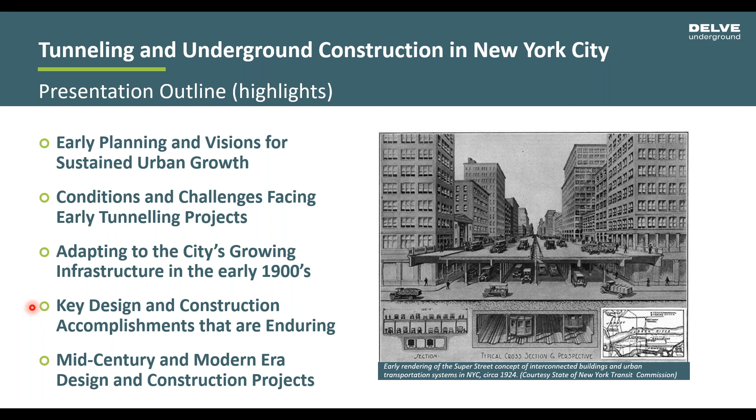Probably the operative word here is enduring, because a lot of things we use today in the city were built 100 years ago. You probably came to work through some facility that's not less than 60 years old. And then some mid-century and modern design and construction projects. I'm just going to touch on them, but it's a broad subject, so I can't cover everything in great detail. Most of our meetings and presentations always start off with a safety moment.

When I found these pictures, I didn't really have a technical use for them. I had a better use for them, and that's the safety moment for this presentation. The one on the right is one of my favorites. It's like everybody's going in the tunnel for an inspection. They're not dressed for work. They're in an open bucket of some description. It's about as haywire as it could be. We don't do this anymore.

The one on the left side is just as bad for different reasons. It's an open, non-decked area in a public environment. I don't know what that fellow's doing walking on the beam, but he's not doing it right. But anyway, all of our meetings, all of our engagements start with a safety moment. This should be no different.

I'd like to give credit to several people right off the bat. Ian Chaney, thank you for the invitation a little while ago. And David and William, I look forward to presenting with you. Anthony Del Vescovo is one of my colleagues from working on the 2nd Avenue.

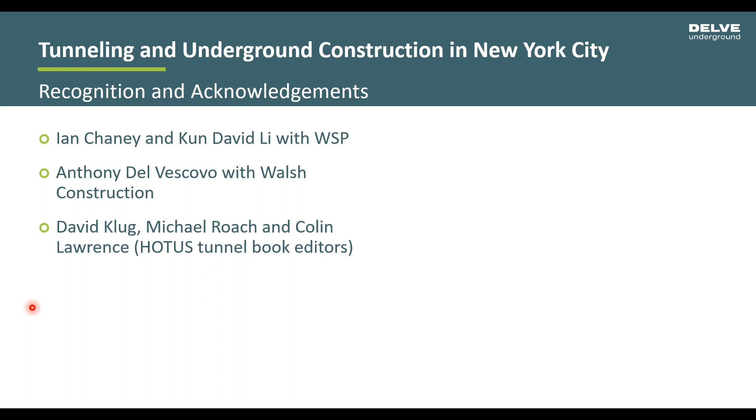He contributed to this, and so did David Klug, Michael Roach, and Colin Lawrence, who are also co-authors and editors of this book, which is a 3.5 year volunteer effort. Some other organizations contributed one way or another to this presentation and need to be acknowledged. See them on the screen.

But there's some others that get no attention whatsoever unless you're really digging. And that's the visionaries. The visionaries in the city years ago, actually decades and centuries ago, that had the idea of what they really wanted to see in this place. And you'll see various slides and various imagery that attest their capability and how they saw this city.

Excuse me, I'm losing my voice.

Okay, other people that need to be acknowledged are people that actually build things. The Sandhogs, the operating engineers, and so on. And finally, even though this is a large city that's, let's say, arguably office and residential, there's an enormous infrastructure here that is linked and that is contributory to actually building work, which is a little bit unusual.

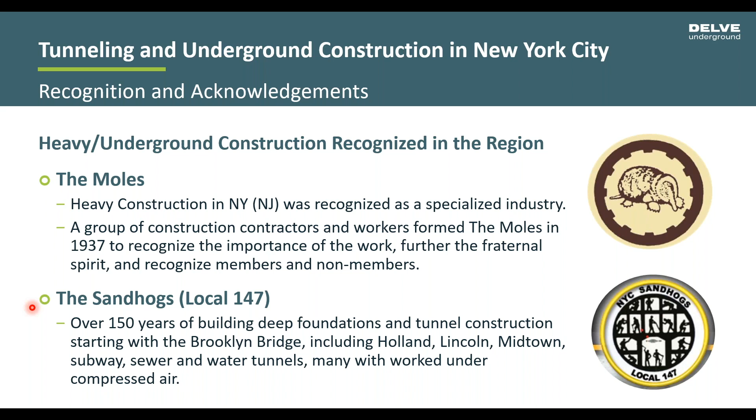So going on to the early planning, the city had a vision of what it wanted to be. Mobility was a big deal, and you'll see some images here of how congested the Lower East Side and Lower Manhattan really was. Sanitation was challenged for sure. Growth and prosperity, this was going to be the center of the universe. And many people who live in New York know it is, even now. So quality of life was always a question.

People lived downtown, they worked downtown, they lived in Harlem, lived in other parts of the boroughs, but they wanted to integrate city planning and transportation seamlessly. So there's a lot of joint use developments that came about.

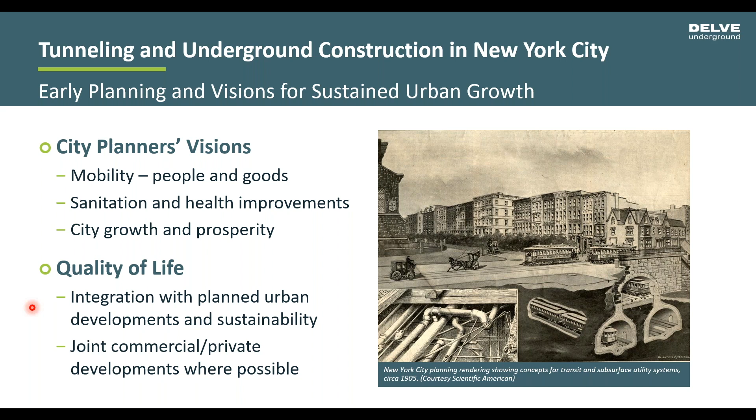This image on the screen is actually very popular to me. It's Scientific American, roughly 1905. That looks like an SEM tunnel or TBM maybe, but long before any of these were invented or conceived, they had a vision of what they really wanted to have.

Furthermore, that image there is Second Avenue in 1924-ish. What's going on there, among many other things, oops, this thing backed up on me, is integrated systems of transportation, multiple levels, multiple modes, along with buildings and other commercial activities. But this is all part of the city planning. You see in the upper bullets there.

And then sustaining. This city did not do something temporarily or with a short life cycle. As I said, many of the facilities we use today, getting to work, going home, or in our daily life here, are decades old, and they will continue. They become older, but they're no less useful if maintained.

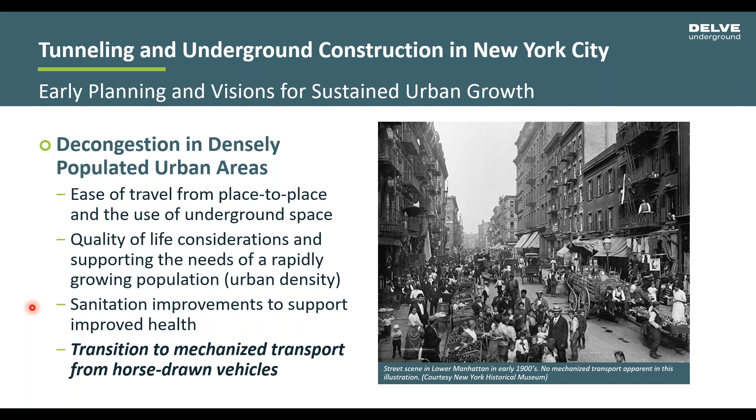Well, the city was finding itself almost not imploding, but basically over-congesting to the point it couldn't expand and it couldn't function. Then the transition to mechanized transport. This is a pre-car image.

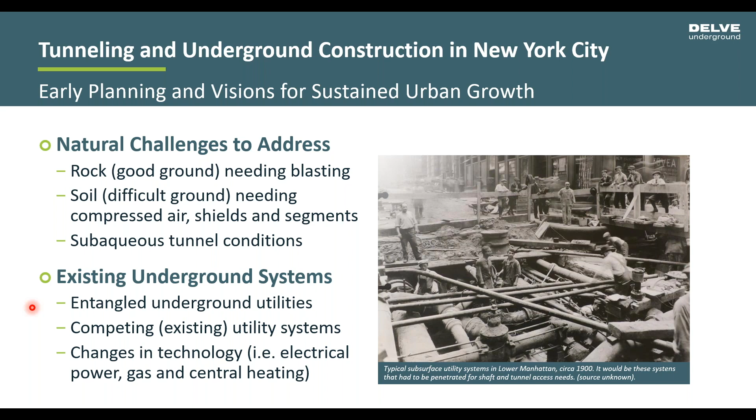The other problem with utilities, I'm just going to say briefly, it does have something to do with tunnels. It has everything to do with tunnels. They're very difficult to manage. If you've been involved with planning major infrastructure projects, the utility relocation work in advance of underground work is horrendous, long, difficult, uncertain, and costly.

Now there's another piece of Grand Central that's not on here, and that's some of the utility rooms that are, to engineers, pretty captivating because they're very deep.

Okay. So again, more joint use of space, commercial and personal and private development. Some of the conditions and challenges facing early tunneling projects. Oh, there's a screen here. I have to show the Viele map.

Does everybody know what the Viele map is? Yep. Everybody put their hand up. Thank you. Like this. The Viele map, first of all, it's a nice piece of artwork. It hangs in our home, at least a copy of it. We went to the map room at the public library, my daughter and myself, and they brought out the original, 4 pieces. Of course, we took it out of the plastic sheets and got our fingers all over it, but they're quite big, but it's there.

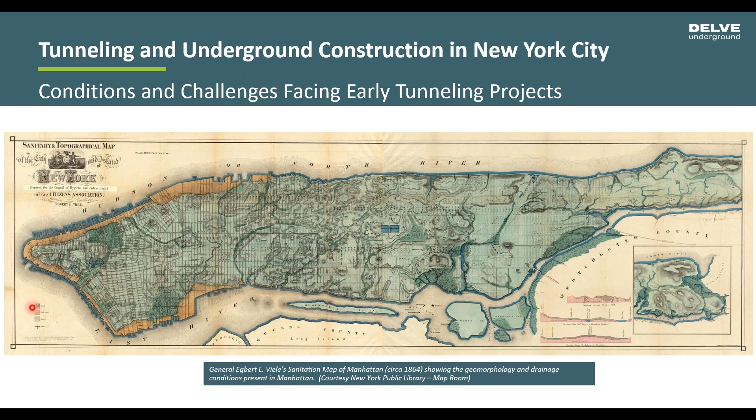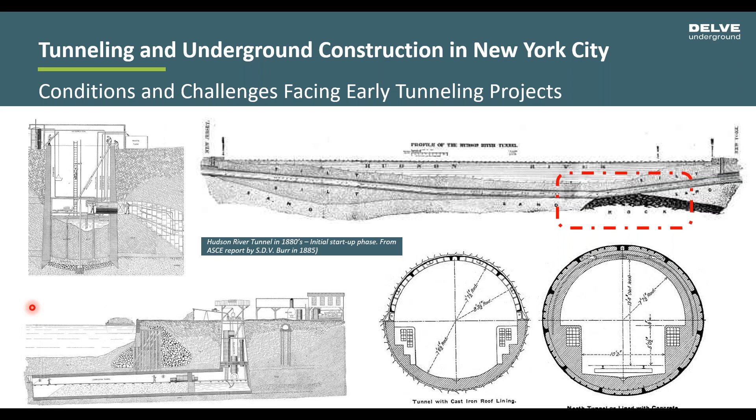So in these 2 images, you see the shafts on the east and west side of the river, and then the cast iron initial liner and the final concrete liner for the rail tunnels. And these are relatively small. These took something like 25 years to build from beginning to end. Okay. Then we get into a rather significant job. I'm just going to touch on this. This in its own right is its own presentation.

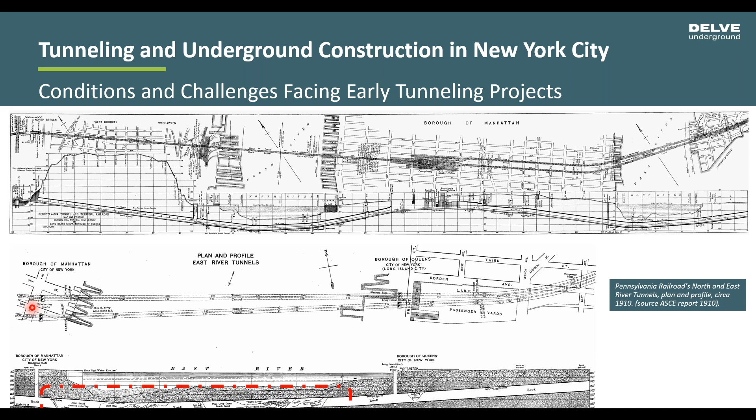These are the Pennsy tunnels, the tunnels across Manhattan from New Jersey across the Hudson. And this was a very major undertaking around the 1910, 1915 era. Again, extremely well chronicled, illustrated in ASCE publications. This is just a piece of one side of it, and the reason I flagged the portion of the image on the bottom is because that's face mapping. That's the early stage of somebody actually looking at the geological conditions in the tunnel as it's being mined and lined. In that particular section, it would have been rock tunnel, so they could actually see the rock.

And the methods of construction included top heading and bench. These are very primitive drills and methods of ground support by our standards today, but in small mining operations, unlike tunneling, they're actually still used. There's some other things that are not used, but nonetheless, some of this is still being used. Soft ground tunnel shields. Remember, soft ground tunnels and shields are really an embedded element of construction of tunnels in New York City. TBMs, I will touch on this later, did not come into the city till the last few decades.

Again, one of the more notable tunnels, this is the first subaqueous tunnel in North America. Goes from, let's say, the Upper East Side to Long Island City. It is a gas tunnel. It was a privately financed job. It was mixed face, rock tunnel, and soft ground. And then the cast iron liners are shown here.

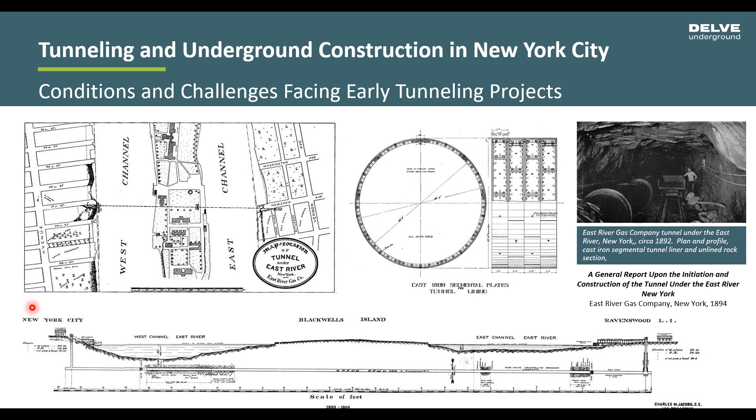And these images actually come from about a 40-page report written by a guy who was in charge of the Hudson River tunnels, went over to the east side and did work on those tunnels for a few years. This tunnel, as long as it is, was built in about 2 years. And as far as I'm aware, it's still in service today. Okay, that's 1892.

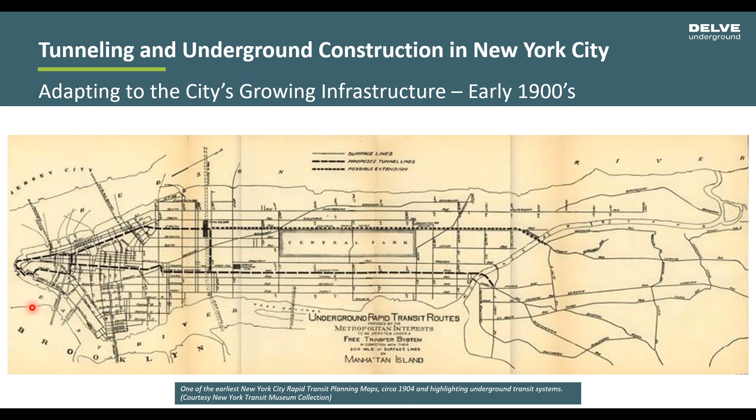I won't go into detail, but let's say 2nd Avenue, which we know has a subway, it used to be an elevated. 3rd Avenue used to be an elevated. Okay, so things are not always that easy. There's a pretty good image if you look at it in various pieces where it was like, we're going to build a subway. It's 1905. We don't have environmental controls. We don't really pay too much attention to settlement, building deformations or anything.

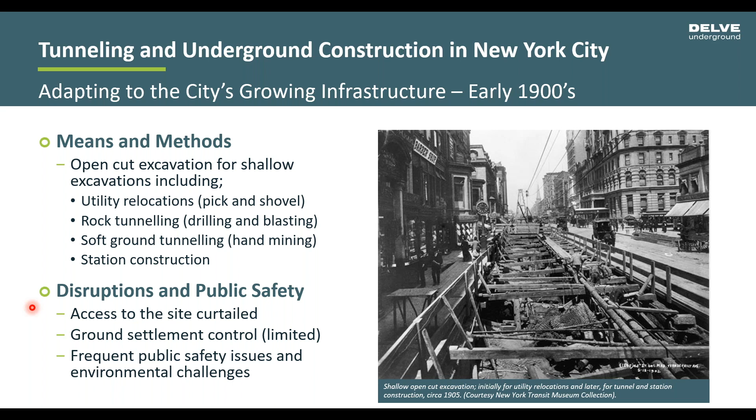Okay, disruptions to public. I keep coming back to public safety, disruptions, quality of life, and that type of thing. This is a theme that is with us now. It's much less than it was decades ago, but at least in this picture, they've got some handrails and a few other things that attend to public safety. If I have time, I'll tell you a little bit about some environmental controls in 1912 that affected Second Avenue subway. I don't know if time will work yet.

Okay, moving on. We've got other subways being planned. They're in competition. We've got, I never get this right, IRT and the BMT competing with each other. Both have major underground operations, be it stations, tunnels. They take up a lot of real estate. They have power plants, cable tunnels, a lot of facilities that run these operations. Eventually they are merged.

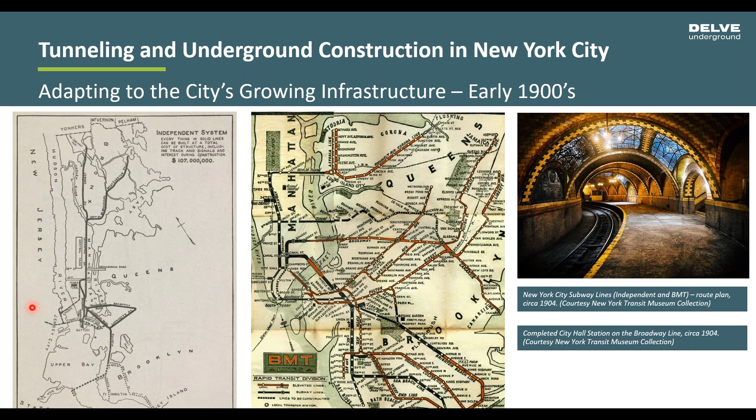But I always like to give a picture of what can be done. And if you look at this one, this is City Hall Station. I personally have not been to this one. Has anybody here had the tour? Is it as grand as what it looks like here, or better? No? Subway conductor. I've been there several times. But it looks wonderful, and it is what it is. It's decommissioned, but this is why when we talk to the public, we can build these things. We can design, build, maintain.

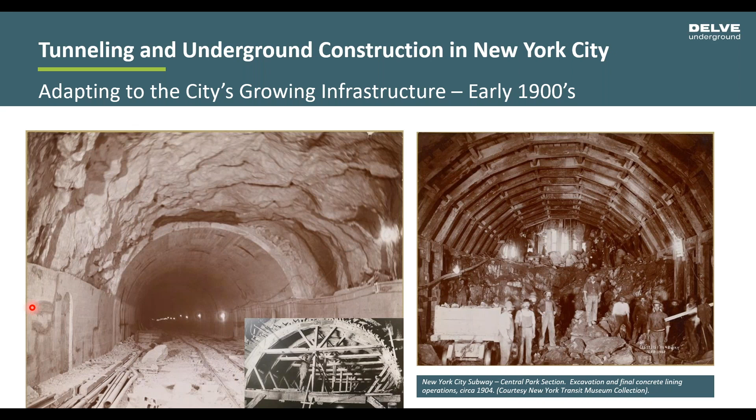Tunnels under Central Park. What's interesting about these images, it really should perhaps talk about the right-hand side. That's ground support as much as it is at the time. But then you look at the left side, the rock portion. It's not a single rock bolt, no shotcrete, no ribs, nothing. And there's a ton of overbreak. That was a bad word at Second Avenue. We had a lot of it. But here you can see the liner, you can see the overbreak volumes outside the liner. But this is work in progress, and we're still doing the same thing with the same forms today. At least they haven't changed too much.

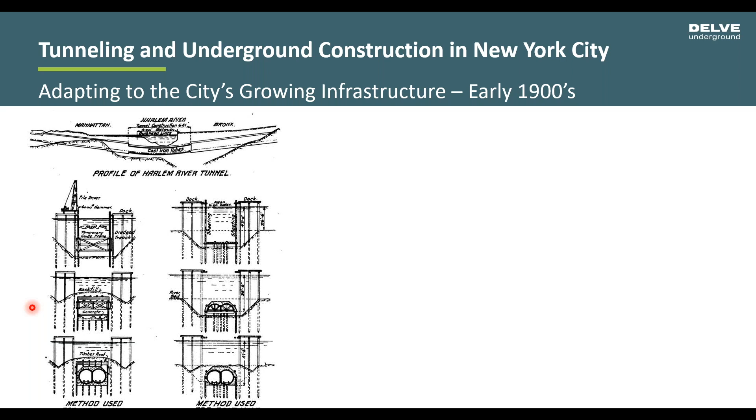This is Harlem River Tunnel. I think it's line 2. Here's lines 4, 5 and 6 with an image of a quad tunnel.

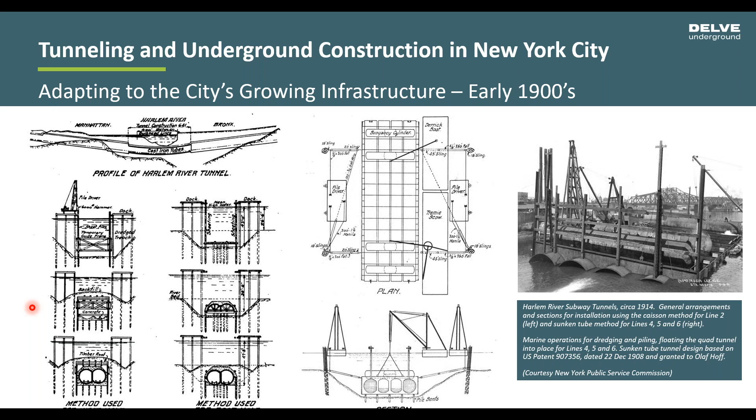And rarely do you see that even today, a quad tunnel. Now, maybe precast concrete, something of that nature in Europe or South America, but we don't see that very often today. Remember, this is in the day of pre-diesel engine, pre-big crane, pre-pontoon floats, and they're doing this around 1915. More of the same.

Here's the drawing from one of the historical researches I did, some of the dredges that were used. And again, this is back in the day when a lot of things we think almost nothing of for marine work and construction work, that's what they did. And this crossing was only like 600 feet. It wasn't particularly long because they had approaches in a water environment. And again, much the same.

We're trying to sink a four barrel sunken tube. I call it sunken tube. Other people call it immersed tube. They're the same. And before I leave that, I really want to say that the patent for this and the original tunnels on this are American. First sunken tube in the world is Detroit. This one I just showed you a second.

Okay, so if I get a drink here, we'll go on to means and methods. I'm just going to touch on this. I know this is a geotechnical crowd or structural crowd. Talking a little bit about means and methods is probably healthy, because I'm not sure who's ahead. That is, the mechanics ahead of the dirt and rock, or is the rock just getting used to it, you know? So this is a typical tunnel shield.

This is something that Alfred Ely Beach would have designed, or his counterparts previously, Barlow from England, Greathead from England. They're all very, very similar, and they're just a shield. They don't have grouting, they don't have drills, they don't have a cutter head, they don't have much power. The survey systems in here are candles and mirrors. I can't begin to explain to this audience how they work, but let's just say it's a set of mirrors, and there is another historical image that has the grid, how it worked, and it's also the same image that shows donkeys in the tunnel hauling the muck out.

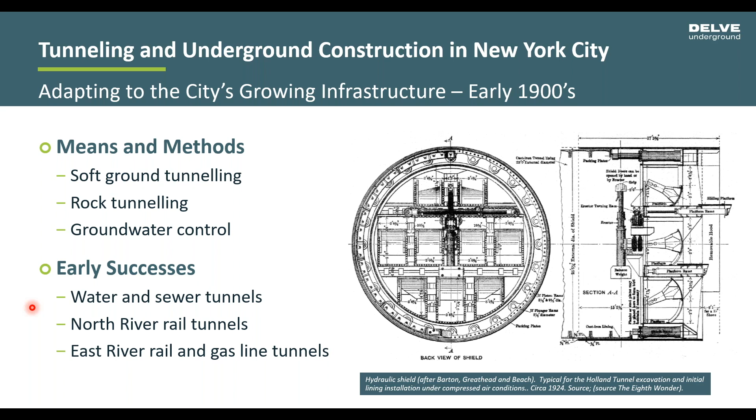But the early tunnels, North River, which is Hudson, East River gas line and other tunnels, this is the type of equipment they would have used. So breasting, you can see the gates on the far right side, but everything is pick and shovel after that. Okay.

This particular, I'm tempted to pass this around, I probably won't get it back. This is a 1925 tray. That image is here. I'll just read it. Hudson River Vehicle Tunnel commemorative tray on the occasion of the North Shields coming together. So that's what it looks like, there you have it. This tunnel went in service in 1927, it's still in use today.

Okay, so what we got now? Now we move on to other tunnels, similar configuration. About 10 years later, this equipment was used for the Lincoln Tunnel first tube. And it didn't really change between the first, second, and third tube, because they're similar ground, similar machines, but pre-TBM. TBM as we know it, as the mobile rotating cutter head. So you got the Holland Tunnel, Lincoln Tunnel, and eventually you're going to see the Queens Midtown Tunnel.

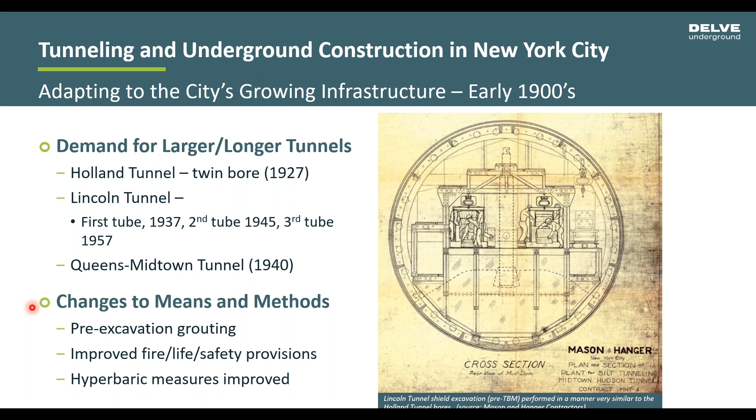But they still didn't have things that were perfected, like pre-excavation grout, which we love today because it changes the ground characteristics, so our mechanical excavating devices and other facilities work better. They didn't pay much attention to fire life safety systems because there's lots of people running around those tunnels that don't look like they belong there. And hyperbaric pressures, a lot of this stuff wasn't really well understood back in the day. Today, with more science, it is far improved.

Okay, environmental, I need to touch on this briefly. Some time ago, a bunch of us put together a very large paper on tunnel muck haul, treatment, spoil. I was just about blown away when I realized through some research that Governor's Island is really the muck that came from the Lexington Avenue subway in 1915. Which sort of explains why it doesn't have trees to some extent, but apparently somehow the muck made it from Lexington Avenue across the water on a barge and landed on the island. So here we have it. What they did about water control, water discharge treatment, don't know.

I know what we do today, and it's a big part of the expense and science that goes into these jobs. Another thing, I mentioned hyperbaric a minute ago. Back in the day, almost every soft ground tunnel in the city was approached as a compressed air tunnel. Well, at least up to a couple decades ago, that was the norm. Now today we have earth pressure balance, but we still use compressed air in airlocks to do servicing of earth pressure balance equipment.

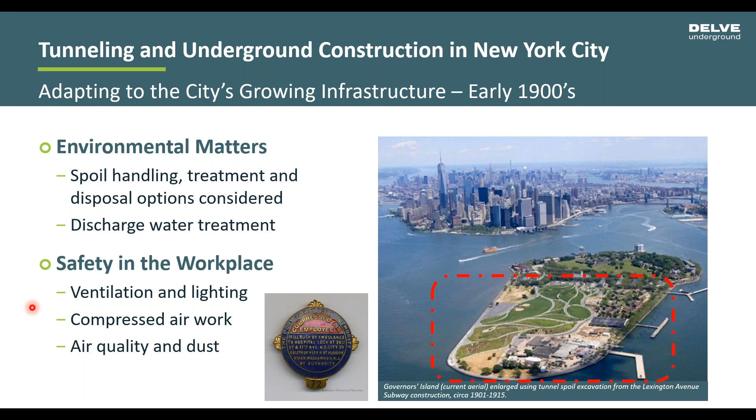That's the badge that people wore if they looked like they were in tough shape, they had the bends or whatever, and they were away from the tunnel. It's like a medical alert badge, okay? But we have far better controls on airlocks, medical locks, people training than was present decades ago. It's commonplace now, but we do not normally use compressed air tunneling. We use compressed air airlocks to get ahead of the cutter head for maintenance and so on.

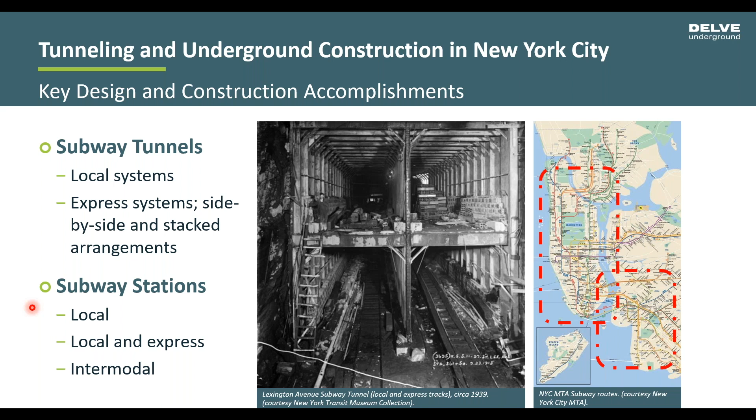More tunnels. Again, the subway tunnels are a big part of the early part of the 1900s. Almost nothing in the middle part except in the 1940s, tunnels under 6th Avenue, but they're all cast iron. There's no fabricated steel for linings. There's no precast concrete. And there's reasons why materials were chosen, largely to do with economics, but also structural, or the infrastructure in the area would not support, say, fabricated steel, whereas in the case of BART, San Francisco, Kaiser, fabricated steel was the answer. Here, in this environment, all roads seem to point to cast iron. So nothing really changed for literally decades.

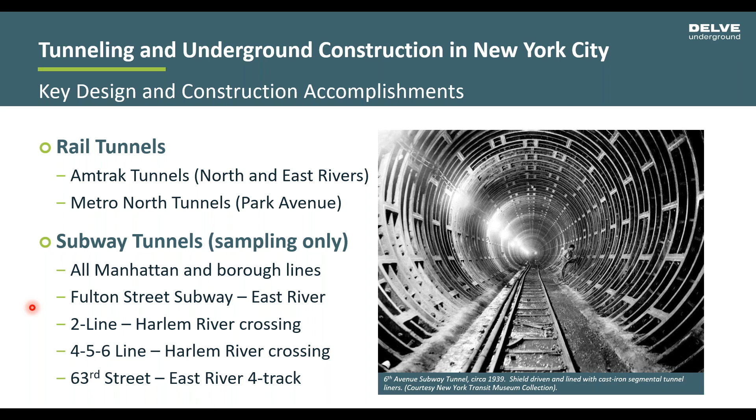Okay? Then I'm just going to touch very briefly on some road tunnels. I've talked a little bit about these, but a few more slides that are important. Holland Tunnel, first vehicle tunnel under the Hudson. I'm sure you all know about it, drive through it, stay away from it from time to time because of the traffic. Very notable from a geotechnical perspective, ran into rock, had to do some blasting in front of the soft ground shields. Very notable from a ventilation and gas extraction point of view. Some of the people involved came from other tunnels. Ole Singstad went on to other tunnels, became very well known in the tunnel industry in North America, largely because of what they learned and achieved here.

That was one of the original concept drawings. Again, I like these things because this is the original thought process of ventilation. They're hauling coal, little cars and trucks. It gives you a sense of scale. If you did that today, it's probably a little short of a shoulder or a pedestrian walkway or fire life safety systems, because they would have been larger tunnels to make them all fit.

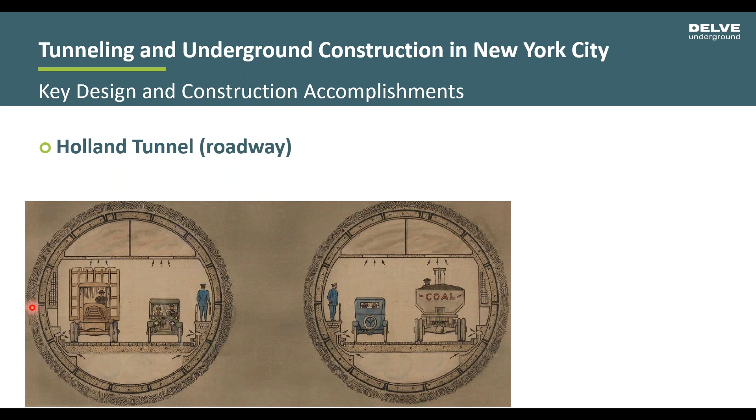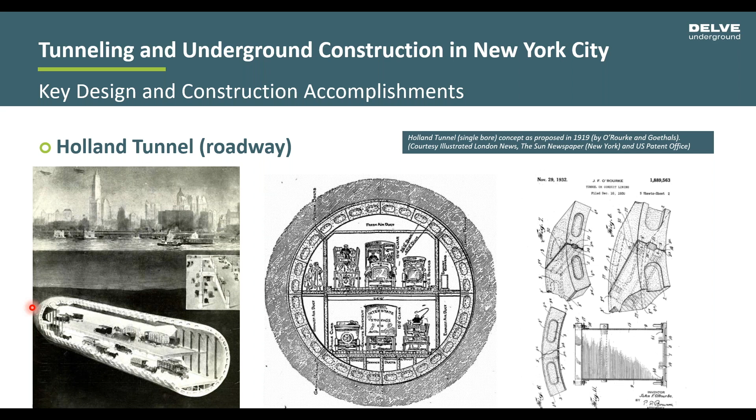It didn't get built. This proposal was made by O'Rourke and Goethals. Goethals is Goethals Bridge, Panama Canal, same guy. It didn't get built. It got built in favor of a twin tube. Same era, 10 years later, almost the same scheme as Lincoln Tunnel first tube.

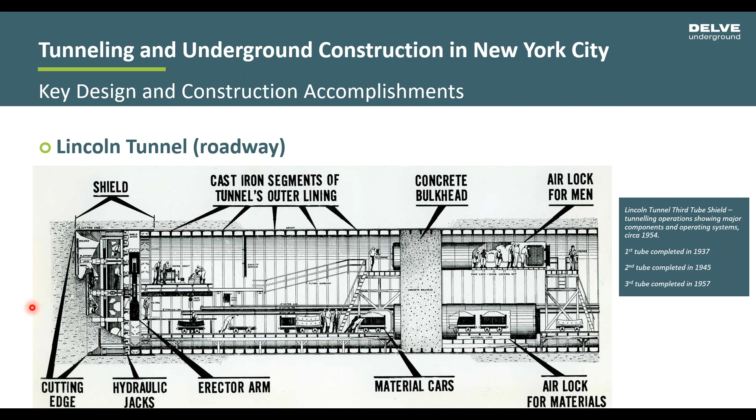Again, this is interesting because it's getting more and more mechanized. We're using cast iron segments. We've got a more elaborate airlock. We've got a lot more goings on inside these tunnels. We've gotten rid of the horses to draw the muck train out and so on. It's virtually the same view with more cross sections. So you can see the enormity of the weldment. And this was prefabricated, lowered in place, and off it went. There would be two of them for each tube.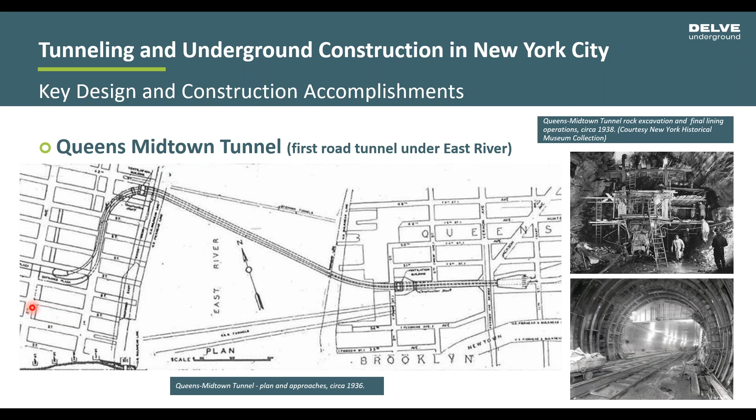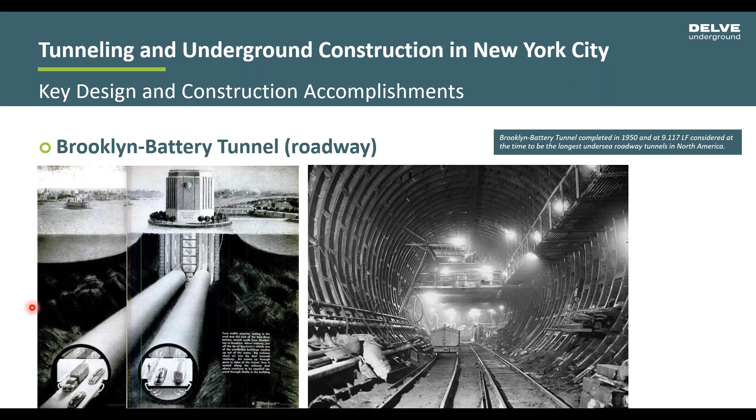This is an interesting tunnel by itself because there's very little chronicled in the technical press or ASCE or any of the societies. This is the Brooklyn Battery Tunnel. It's very significant because it's the longest underwater tunnel at the time. But because it was built post-war, I suspect there was a little bit of secrecy. There's more written about this tunnel in Popular Science and Popular Mechanics than anywhere else, or Look magazine. But again, still in use today. I think it was commissioned around 1950.

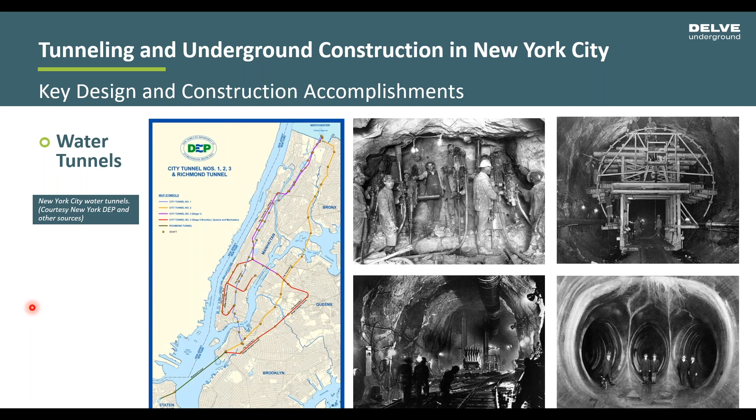Now, I'm not going to say much about water tunnels. I'm sure everybody knows a lot about water tunnels. It deserves its own lecture because they are very significant. This is just a map of, for instance, the local tunnels around Manhattan, some of the vintage drawings or photographs, but that's what we used to do, unmechanized. So it was mechanized from the point of view of having an air drill, but it was not mechanized from the point of view of hydraulics and other equipment that we know today. We wouldn't normally do that type of tunnel today without major TBMs.

And it was eventually built in the late 60s and early 70s, but it was like the tunnel to nowhere. At least the top, I'll never get this right. The top two tunnel carriageways were used, the lower ones were not, for the longest time until Second Avenue Subway was commissioned. Okay? And that was in 2017.

So now we're going to talk briefly about Second Avenue Subway, which is one of my pride and joys. I worked for the contractor. We built 72nd Street Station and tunnels. Initial planning in 1929, but the documents go back to 1922. So 100 years ago, people were thinking about putting an underground subway up Second Avenue and getting rid of the El. Okay, they had a vision. And part of this is mobility, as I keep saying, part of it is just growth, commercial development, and so on. But about 2 months later, the Great Depression kicked in. Okay, so we restart in the 1940s and 50s.

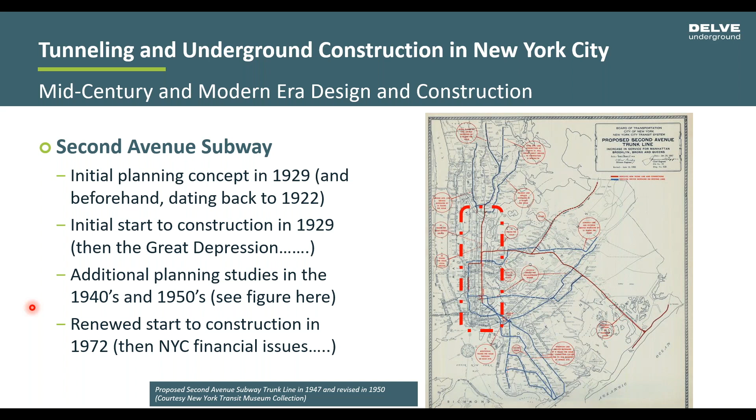There's, get my image right. This document, this drawing is edited in 1950. There's a very important connection of Second Avenue Subway with 63rd Street Tunnel, which is probably a dream at the time in around 1950. But then in 1972, it sort of got a restart.

Here are the people on the ceremonial pick and shovel, picture taking opportunity. Anybody recognize people in the picture? Sure. Who? I think that's Mayor Lindsay. Who? Mayor Lindsay. Who's the guy in the middle? Rockefeller, yeah. Well, that's the one I recognize, but okay. And then actually, some of the work got built in the high 90s. Yeah, that was Mayor Lindsay, yeah.

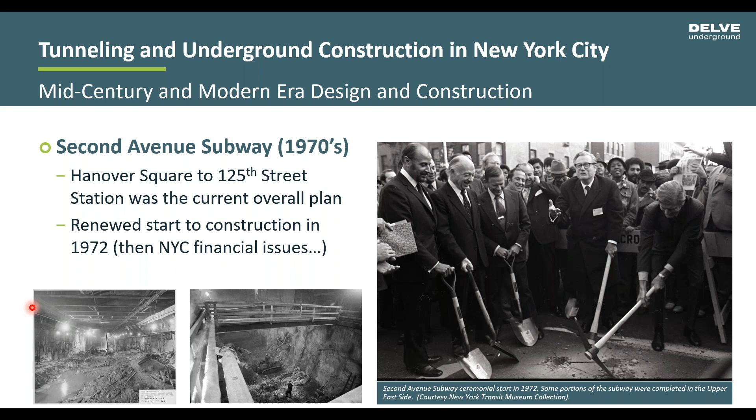Okay, and some of the work got built in the high 90s and got, I'd call it, mothballed or abandoned. Later, it got restarted in around 2007. This is the hoopla to say, oh yeah, we're on it again. These gentlemen seem to be pretty happy about it. And then the concept was different.

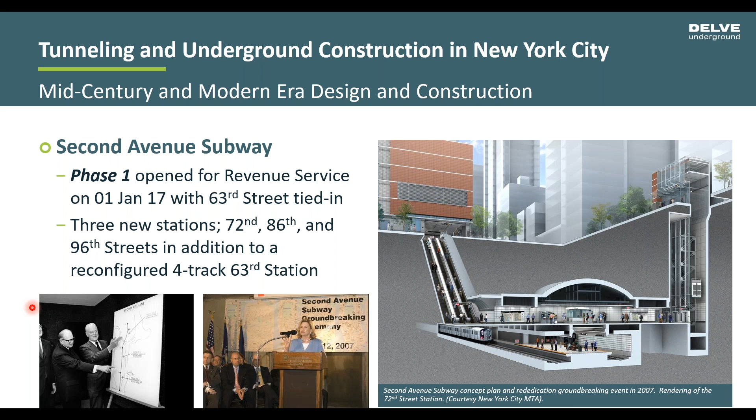It was different because it would have high arch, a lot of voluminous excavation, stations that you had lots of artwork, which I'm not showing pictures of. It's a geotechnical conference, but the artwork in these stations is fantastic. And it makes you feel like you want to ride the train. So that's 72nd Street. There's many other images much like that for 86th Street and 96th Street.

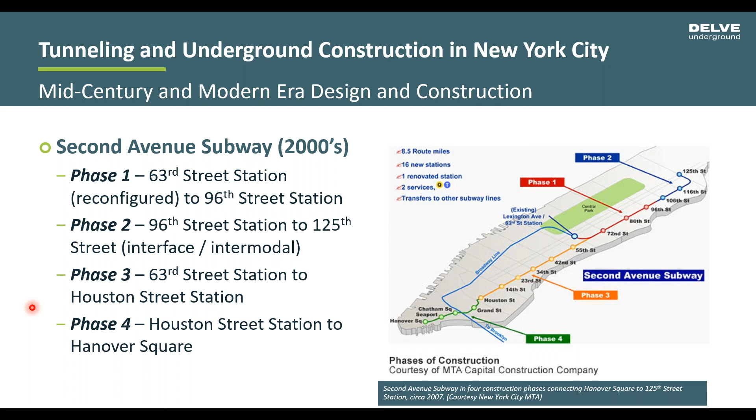So as you probably know, there's several phases. We finished phase 1; phases 2, 3, 4 are in the future. Remember, the concept started in 1929, so the future is quite long. And then say one more thing.

This is our job. And people in this neighborhood were, I would say, not anti, but not in favor of; not in my backyard issues would creep in, disruptions to their lifestyle. They didn't like blasting. The windows would shake. It was kind of annoying. And then you go to community meetings and people stand up, pound the table and say, when will it be done? I want my grandkids to ride the subway. Come on, move it, let's go.

But there was also a bit of a revolt over dust. And I bring this up because this was current. This is something we had to deal with. And then years passed, decades passed, it didn't come up. Same with blast vibrations and so on. So

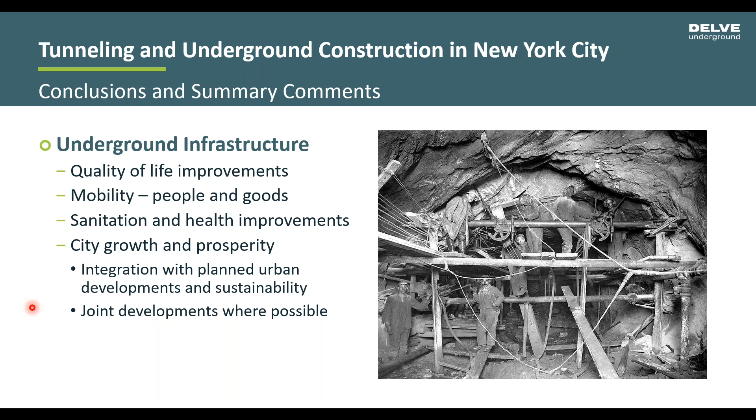Conclusions and a little bit of a summary. This is much like I started. Why do we have all this? It's enduring infrastructure, quality of life, mobility, commerce, growth, prosperity, and integration. So we don't have to spend a lot of time wandering around on transportation systems, other systems, utility systems that work some of the time, but it's all part of better use of underground space. And then use of technologies.

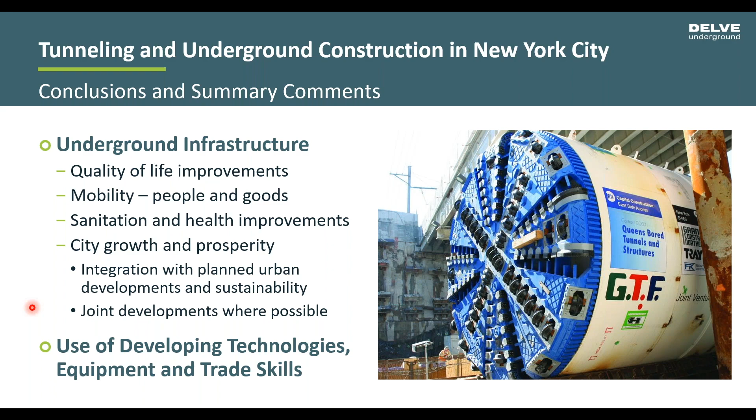This is the Queens Bored, we call it Queens Bored Tunnel. There's 2 TBMs in the Sunnyside Yard area. And since then, there's been TBMs on 2nd Avenue and the Water Tunnel. But it's been a long, slow process. And with that, I think I'm out of time.

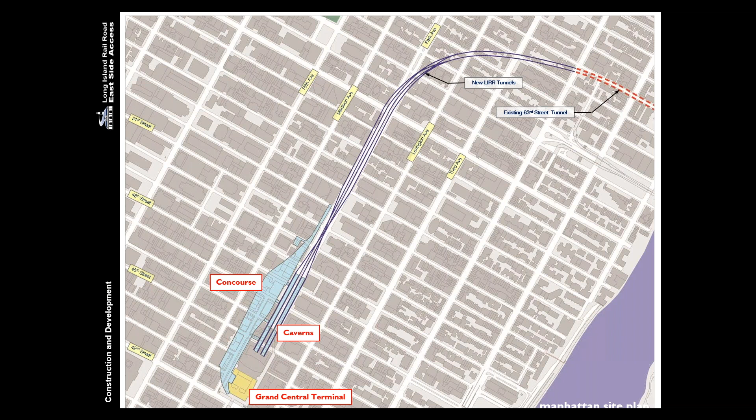So Queens is off this map, but the Manhattan alignment at the very least starts from, as Brian mentioned, the 63rd Street Tunnel. Okay, and it goes west, veers down Park Avenue, and then it goes underneath the Metro-North train shed, where the Grand Central Terminal is.

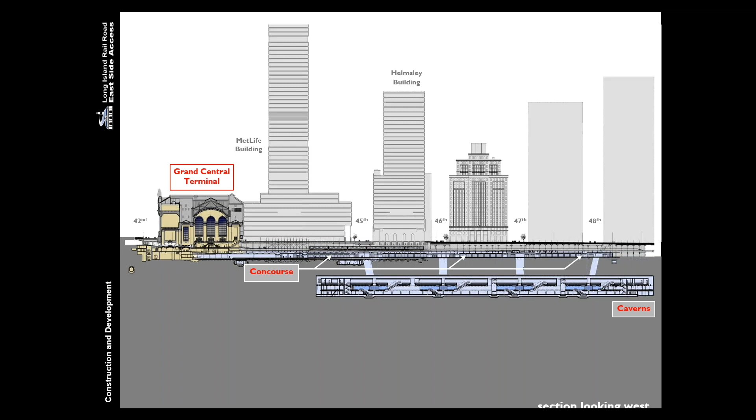Here's the longitudinal view, and the main cavern station is underneath the MNR train shed, and it's underneath the Helmsley building and the MetLife building. And there on your far left, that's the historic landmark, the Grand Central Terminal.

Here's a cross section of the terminal station. They're twin caverns, 4 platforms, and 8 tracks each, connected by the cross passage and connected via these escalator shafts that lead you to the concourse. Now you can see from this photo here, the MNR train shed, the far left of the lower level, has been removed to make way for this concourse.

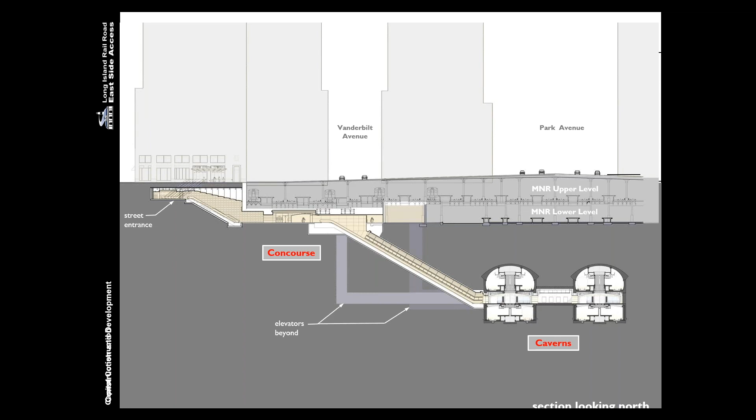So as Brian mentioned, the 63rd Street Tunnel was envisioned since the 40s. It was sunken in the 70s or so, and the 2 upper tracks were for the subways, whereas the 2 lower were for this Long Island Railroad project. That pair of tunnels makes its way into Manhattan. It bifurcates into 2 pairs, which then further bifurcate into 4 pairs, which make the bores of the main cavern station. That's the 8 bores that you see here.

So excavation starts with the bore, and then the upper portion, or the cavern arch if you will, gets enlarged, and excavation begins with a top-down approach. Here's the cavern arch that's been excavated, and the scale is a bit off here, but the cover between the arch and the MNR train shed was about 15, 20 feet or so.

Okay, so to supplement some of the ground improvement and the rock support to hold up that MNR train shed, we built what we call the separated arch, which essentially means the final lining of the cavern starts almost as a top-down approach. The roof was built first. This is not unique. Taking advantage of the Manhattan bedrock, the separated arch was able to socket and seat onto the rock ledge, which then supports the rock and the MNR train shed above. From there, they benched down for the remaining excavation.

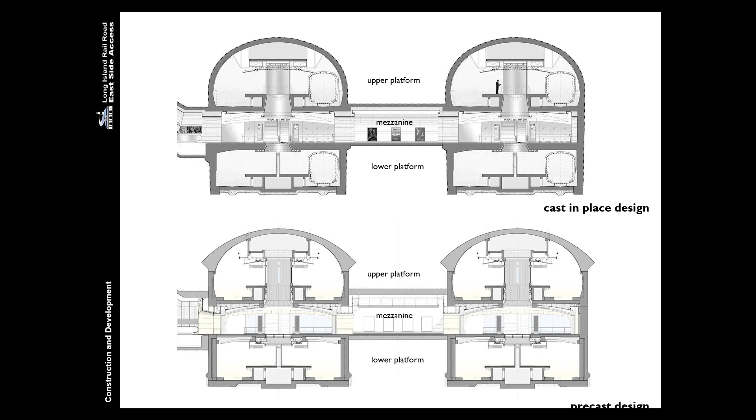So what are the benefits? There are many benefits to precast. Particular to our program at that time, we needed an early start. With precast, you can start creating these members ahead of schedule and off-site. This reduces schedule risk. This takes things off the critical path. You limit on-site operations underground, with limited space and logistics. It reduces the construction schedule, with repetitive shapes. You build it once and you can build it a number of times. You've got yourself a very efficient design.

The quality of finish: surely casting something out on site can't be as high quality as doing it in a controlled plant. With quality comes durability, and if done right, you can integrate this with an architectural finish, which was taken advantage of on this project. Pre-planned connections: oftentimes out in the field, things are not really where they're supposed to be, but with precast, you can really lock it in, and all the connections are the same. Even the installation process becomes routine. So all these are great benefits of precasting in general, but for this program, of precasting the main cavern station.

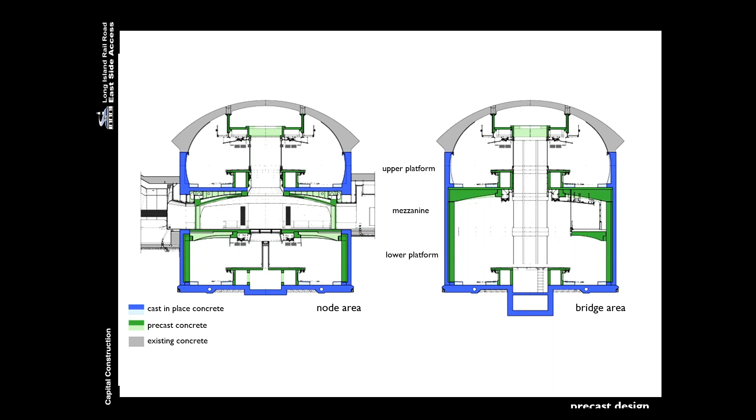And the objective really was to try to make everything as green as possible, try to make everything as precast as possible. But you always come across how to connect them. You always come across, there's still a waterproof structure, how to integrate the structure with the waterproofing, etc. So there is some cast in place as well.

Other things to consider, you have to really define the parameters at the get-go. When it comes to precast, you have to consider the weight of it. With that weight, it defines the geometry, defines your final shape. You have to consider that these things are going to be handled, lifted, transported, erected. And so, at least for design purposes, we set a parameter of 25 tons.

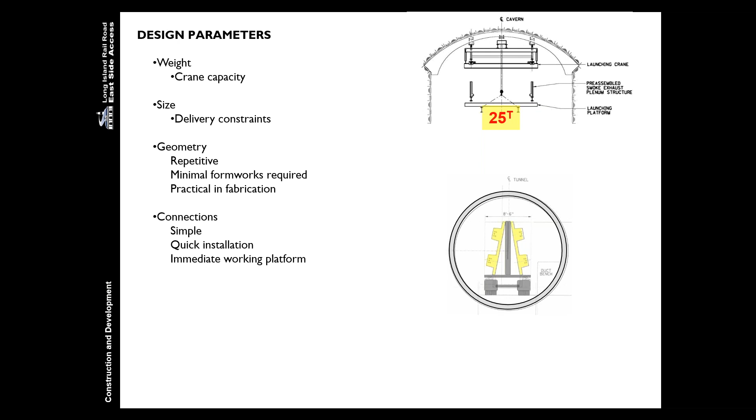And then we had to also consider some members of this might be too large, where you might have to break it up. Okay? The more things you break up, the more things you've got to consider how to connect it. And you've got to consider connections to be quite simple, fast, easy, and it'll create what we call an immediate working platform. So as you install the beams, as you install the decks, you have yourself a working platform.

So this is just an overlay of all the upper level, mezzanine level, lower level. And what we're looking for here is how to even start considering for precast. You start studying your structure, and you start looking for repeatability. And you'll notice here that you study the structure such that you pick a limit where it starts repeating again. And we zoom into what we have here. This boxed out area repeats itself 4 times.

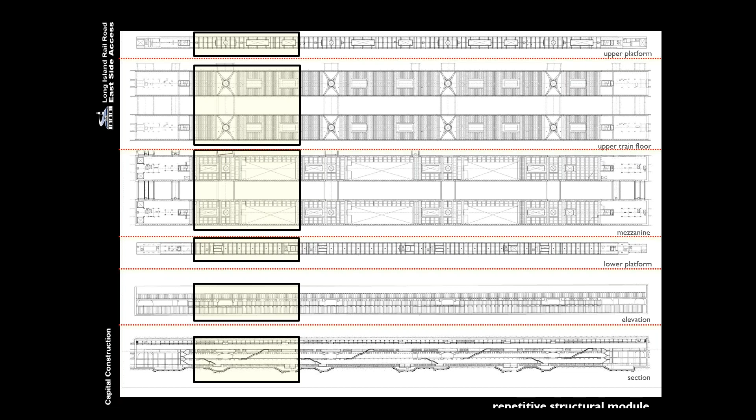Naturally, for the layout of the Grand Central Terminal, everything revolves around the nodes, the streets, which are namely 45th, 46th, 47th, 48th Street. You zoom in onto this, and then you start studying each beam. Now, when it was cast in place, you can vary the geometry a bit. Oftentimes, you try to optimize it, minimize it for a number of different types of beams. But for precast, you do that even more so.

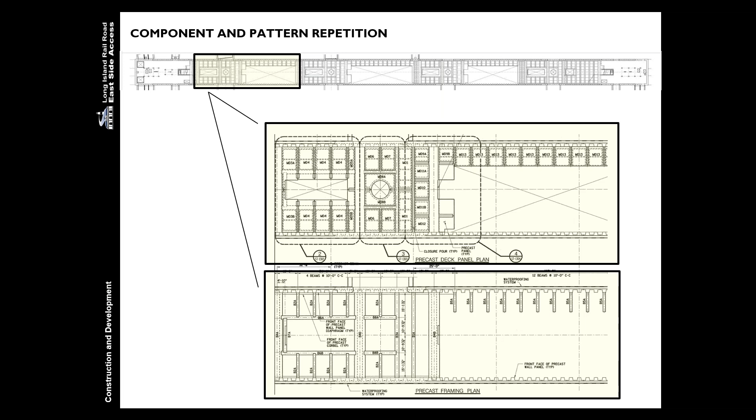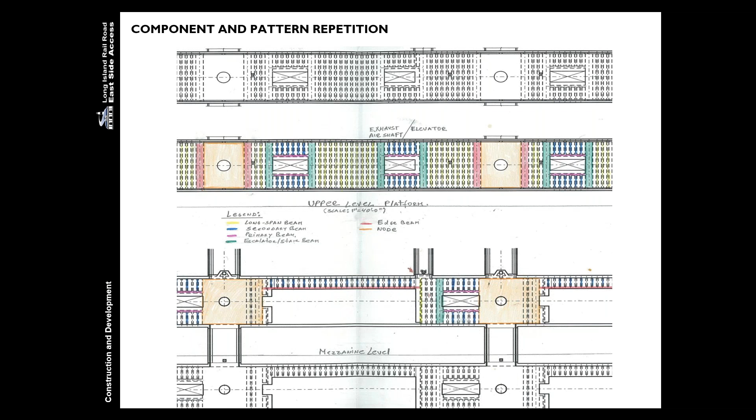Okay. This is a 3-dimensional rendering, but it shows the 3 different modules, as we call it during design, of one particular area that seems to repeat itself throughout the length of the cavern. This is a very early rendition of color coding like-kind beams, trying to group things together. And we do this several times over a couple of trial and errors until, over the evolution of this exercise, you start fine-tuning the number of different types of beams.

You also have to start thinking about how to break up the beams. Do you do a double T-beam? Do you do a single T-beam? Or do you break the T-beam altogether into a beam and that type of configuration? Now, as I mentioned, the more you break it up, the more you have to think about how to connect it together.

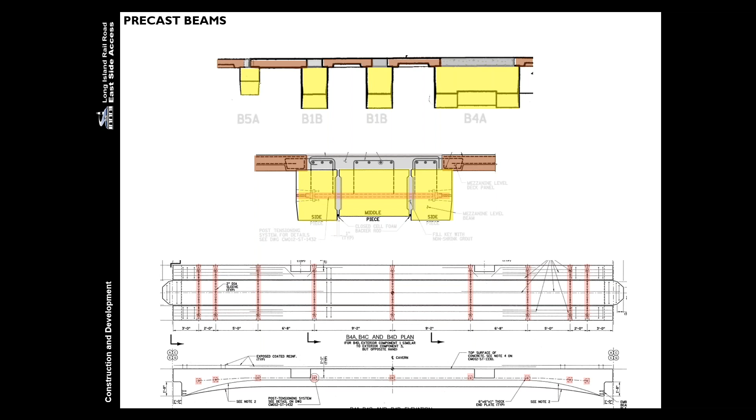There were some large elements, as I mentioned, that exceeded the parameters that we set forth at the beginning, size and shape, and weight. And so you have to break that apart too. There were cases where we had what we called a multi-beam, where it was a large beam that carried the escalators, if you will, where we had to break that apart. Again, trying to keep within that 25-ton weight limit. All said and done, after the exercise, you have something like this, where you envision how things all come together.

The more you break things up, you're actually reducing its stiffness modulus, and so you have to now consider camber and deflection. With cast in place, you wouldn't need to worry about this.

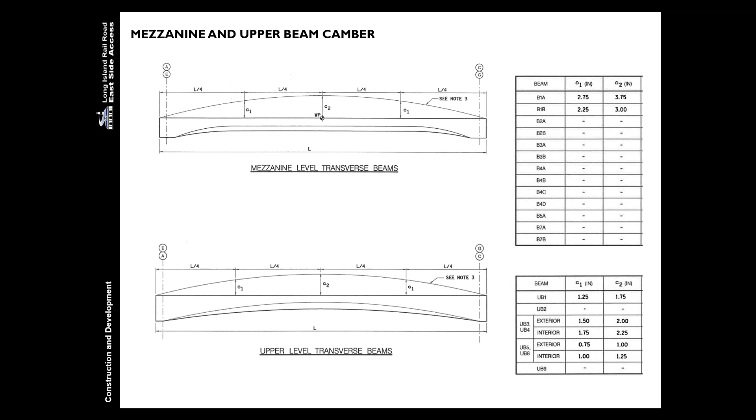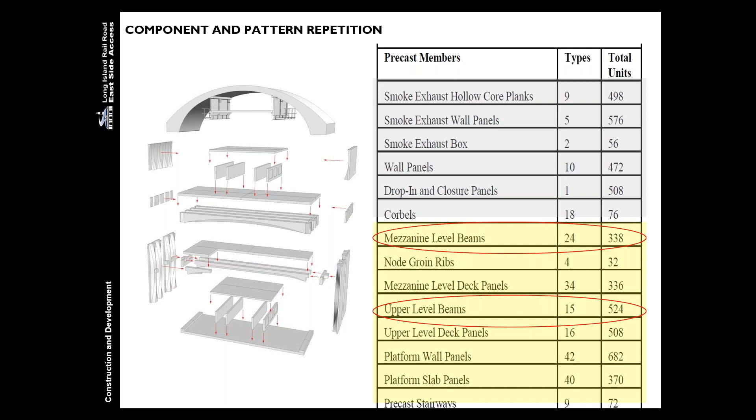So, all said and done, you try to come up with as few different types as possible to be used as many times as possible. And the two that I just want to highlight here are, say, the mezzanine and the upper level beams. Okay, there are 24 what we categorize as 24 different types that can be used 338 times. That's more than 10-fold. Whereas the upper level beams, 15 different types, used over 520 times. So what is that, 30 times repeatability, if you will.

Once we got this out to a contractor, they submitted their study of it, and this is a precast. It's formulated with our precaster, and they determined that they can get away with 8 different types of forms that'll build the entire 862 beams. So they have even 100-fold. Okay. Again, benefits of precast.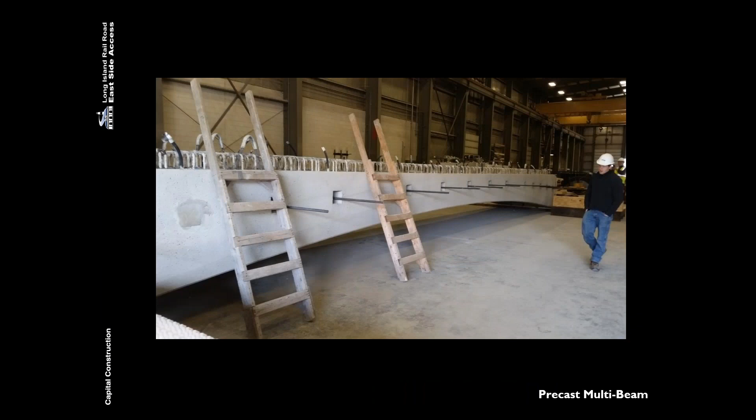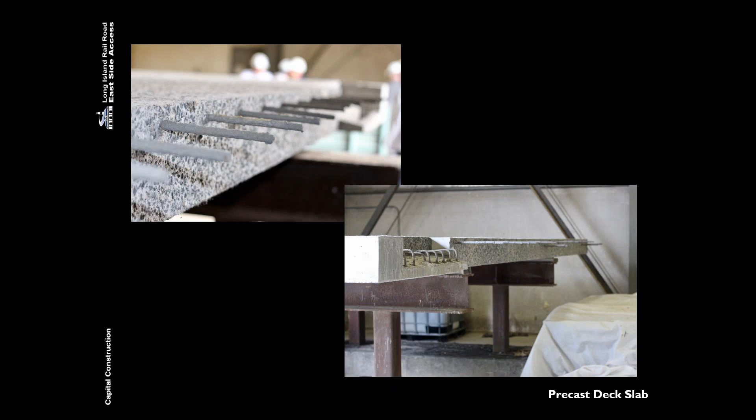These are some of the post-tensioning rods that put the beam together. Some of the precast decks. Here we are taking a look at any fine cracks that can be addressed while out in the precast plant. The top surface of the deck slab, even the surface prep can be done at the plant. Here it's scarified because it's anticipated to receive a topping slab. Again, great care, even any exposed rebar is cementitiously coated to prevent rust while it's waiting in the stockpile. And there are some of those geometric details that I explained earlier about the little hammerhead and the boot-shaped finish, where you can eliminate the need for formwork to complete that closure pour. Completed decks, ready and waiting at the precast yard.

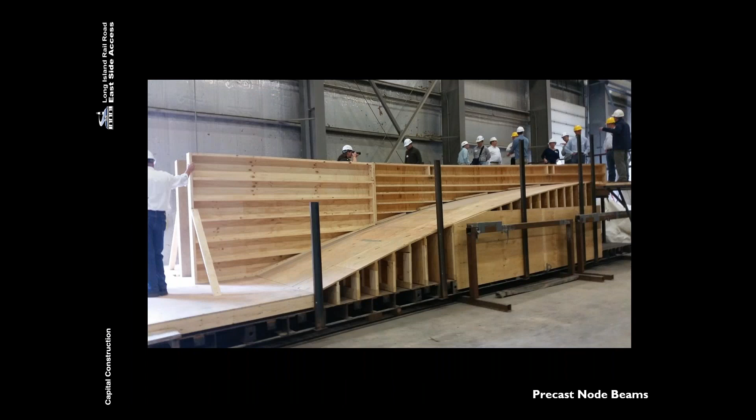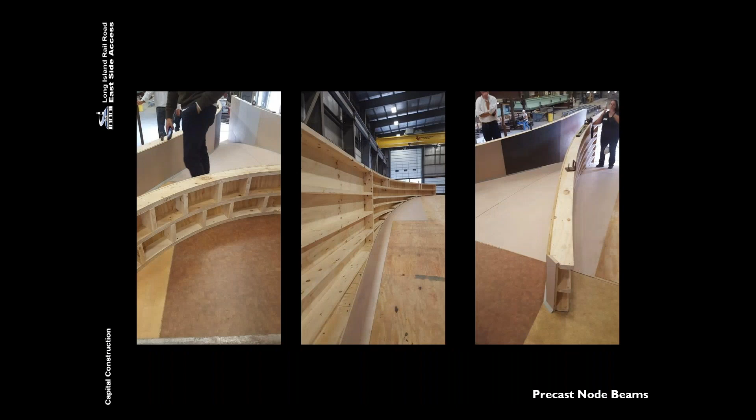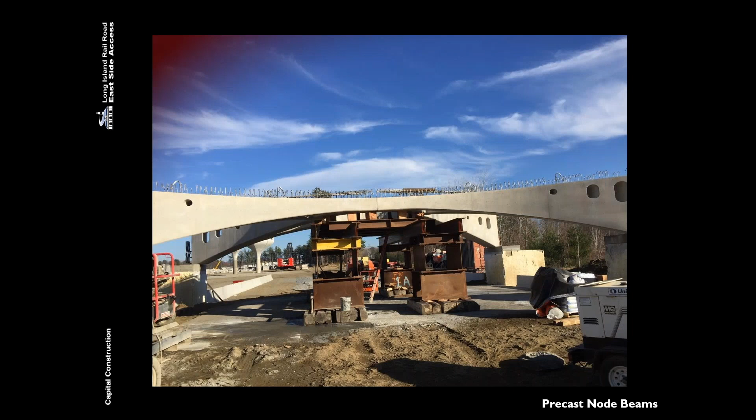Some beams that were not as repeatable and fairly unique in their own right were built out of wood. And these are the node beams, with the geometric curves and whatnot. You must respect the carpentry work on this formwork here. All the curves and shapes and stuff. Rebars in that node form. That styrofoam block out on the far right side there, those are for the post-tensioning areas. This is a mock-up of the node area. All 4 nodes make up the structure here.

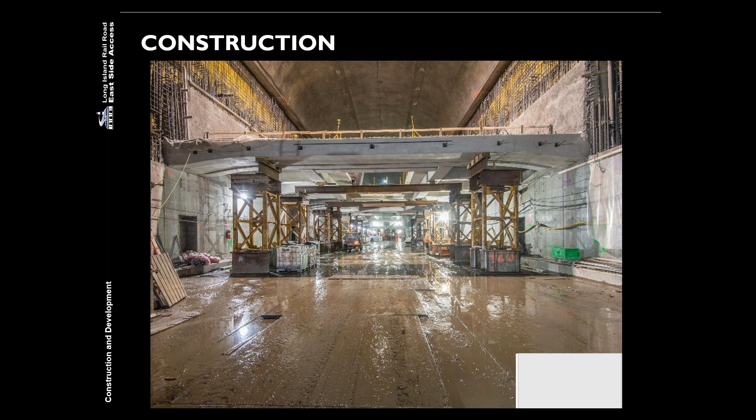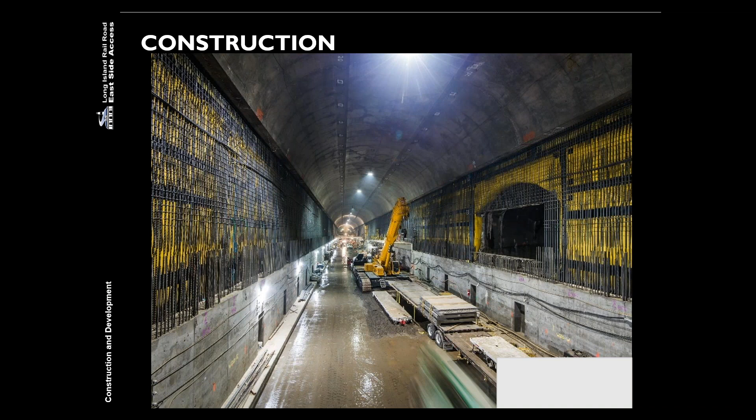The mezzanine beams have been installed. Now we're placing the deck slabs. You can see the deck slabs are now ready to have their closure pours placed. Again, with the immediate working platform, you place these decks and you can work off of it.

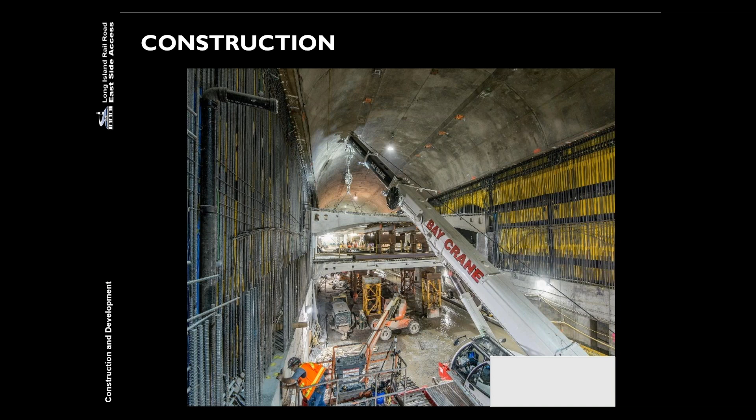The node beams being installed, you saw this earlier in the markup, now it's being installed on site. These open areas, the contractor took advantage of as their areas to be able to reach and install the upper level beams. The deck slabs around the node beams are being installed. This now makes the upper level slab. This is the level the trains are now running on.

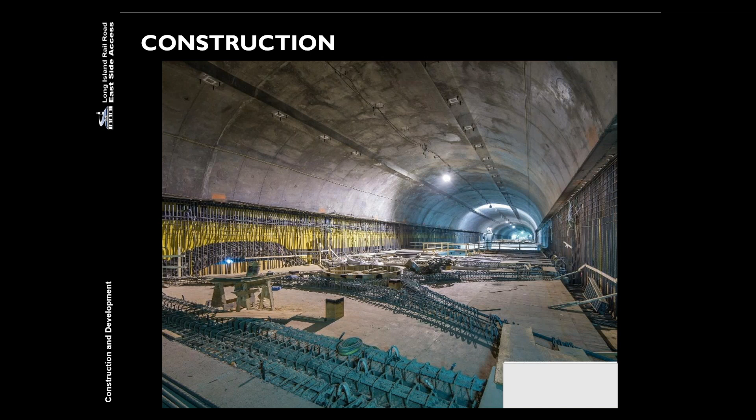This view here is from the mezzanine level, overlooking that open area where you can actually see onto the lower levels. During design, we dubbed this the bridge area. Here we are from the invert level looking up at this open bridge area, and you can see the two levels of beams. Again, portions of the underside of these beams are exposed, and you can see that on site today. And this goes back to the integrated architectural finish benefits of precast design.

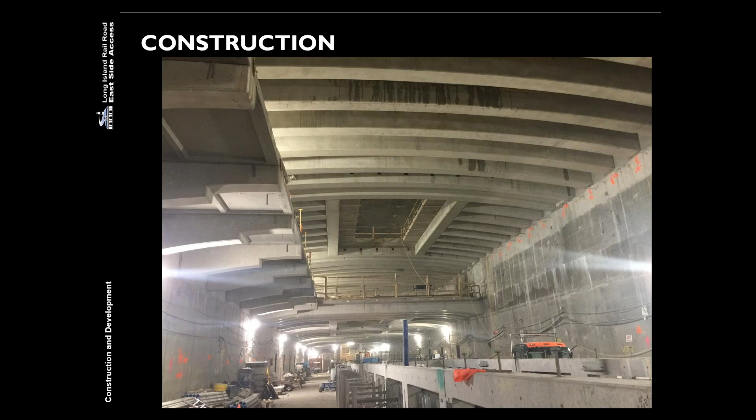Even the smoke exhausts were precast, again, to lend itself towards accelerated construction. Unfortunately, you don't see this out on the site because it's covered with nice architectural finishes. On the lower right there, you can also see the precast platforms being installed. This is as much as the precast goes. I'm going to share a few photos of all the other finishes and elements.

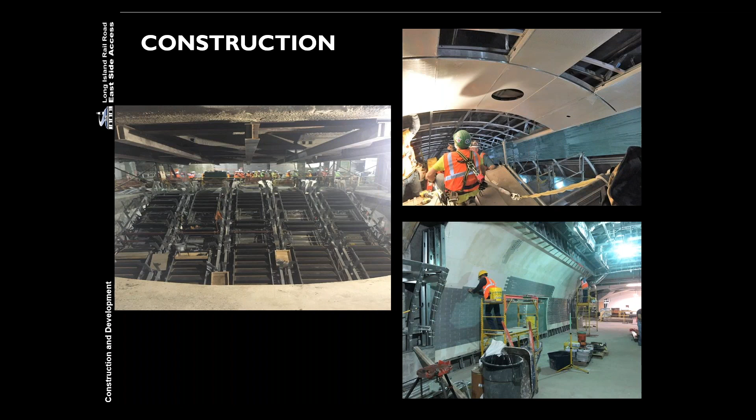These here are the steel elements for the elevator and the escalators. These are finishes for the escalators. The upper right photo there, that's the 45th Street node, the only one that has 5 bays of escalators. 46, 47, 48 have 4 bays. But you can see this is the tiling and the architectural cladding being installed.

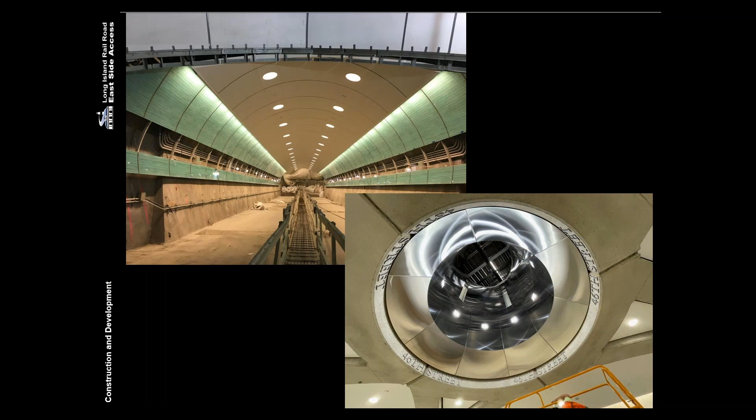Terrazzo finish, those are just concrete toppings that I mentioned earlier that go on top of the scarified precast deck panels. But even the prep work is part of the benefits of precast design. You can really see the station coming together now. Some of the finishes, the cladding, the metalworks around the smoke exhaust at the node area. You go there now, you look up, this is what you see. This here specifically is 45th. You can see by the wayfinding text over there.